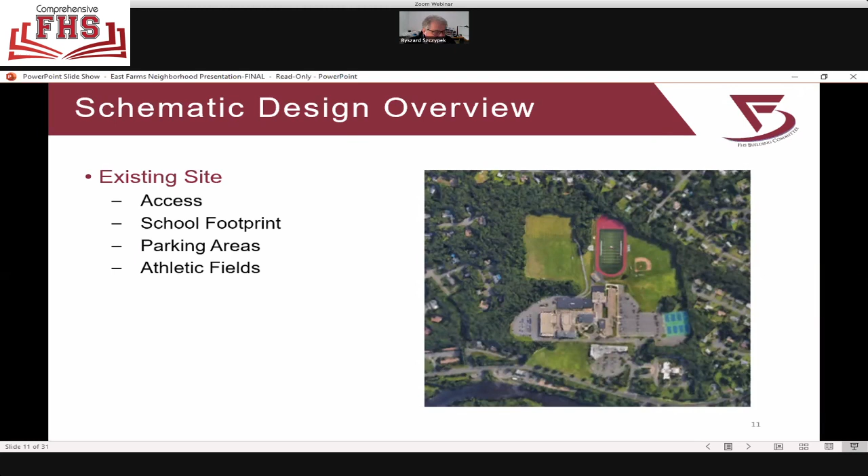Once it was determined that there were no other viable sites available for a new high school, it became our task to develop a design that would be accommodated on this site. So we had to find a way to build a new building on the existing site while minimizing disruption to the existing school. This diagram illustrates our solution.

Right now, it's too narrow, and people trying to create two lanes in a single lane create a dangerous condition. So the project does include improvements to Monteith Drive, making each side wide enough for two legitimate travel lanes. There's also an improvement to the shoulders on each side of the drive for emergency vehicles, should they be necessary.

This proposed layout on the site achieves the goal of making a very compact facility on the existing site while minimizing disruption of the existing building. We did look at the existing building and we determined that a portion of it could be saved, namely the 900 wing, so that's made part of the plan.

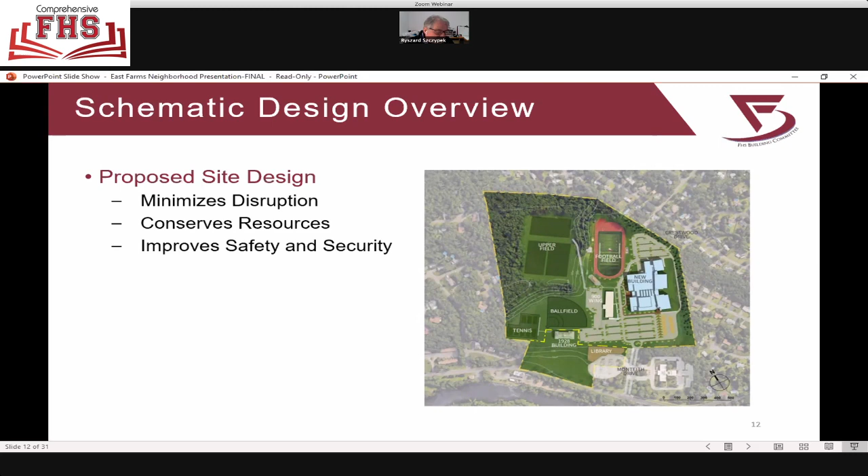This walkway that you see here is between the vehicular drop-off area for cars and also buses on opposite sides of this walkway. The administrative offices are located on the ground floor, immediately adjacent to the entrance. And the exterior is constructed of very energy efficient material, very durable, such as masonry and glass, which is also very easy to maintain.

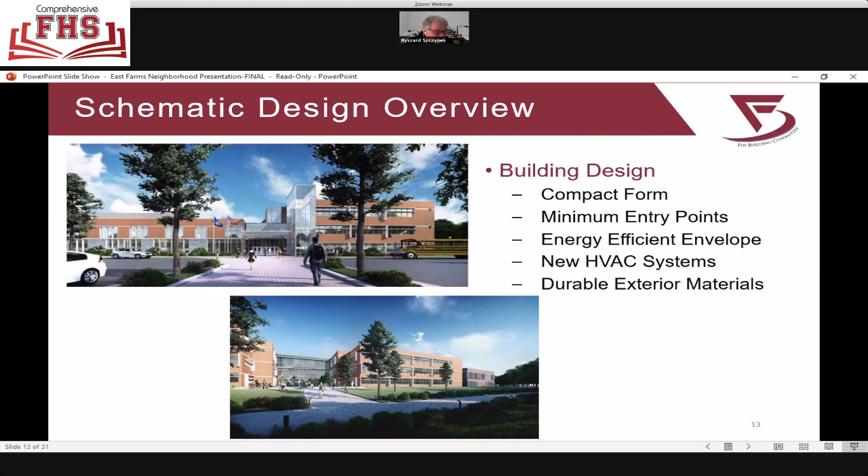This is the loud side of the building. It faces the 900 wing and it faces also the football field. On the opposite side of the building, which is in the illustration on the upper part of this slide, is the quiet side of the building.

This is where the academic spaces are located. There's no public entrance on this side. We do have a walkway, as you can see, that travels along the eastern side of this site, but that walkway is for emergency purposes only. There would be a gate at each end of this walkway, only available for emergency vehicles.

We're also planning some screening that you can see here on the right side of the site in this picture, with some berming and additional plantings.

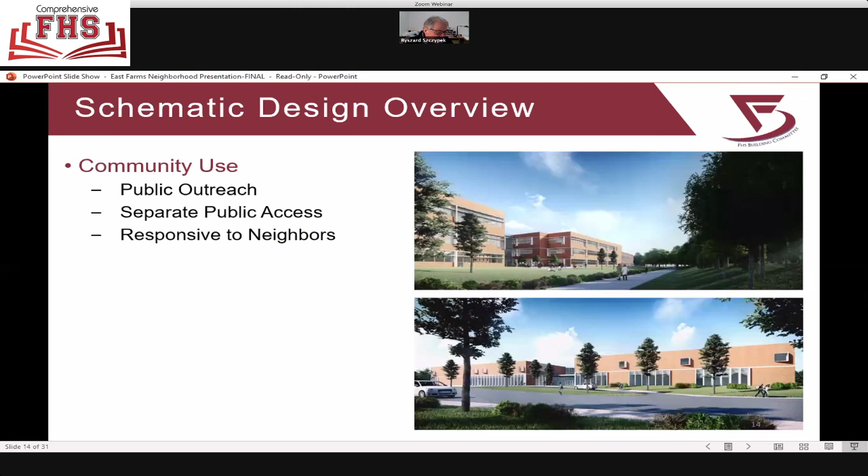The interior of the building will be filled with natural light using skylights and clerestory windows up above. There will be ample circulation area to give the students comfortable space to safely pass between classes. And the interior finishes will be very durable and easy to sanitize and keep clean, such as the porcelain tile floors here in the public spaces.

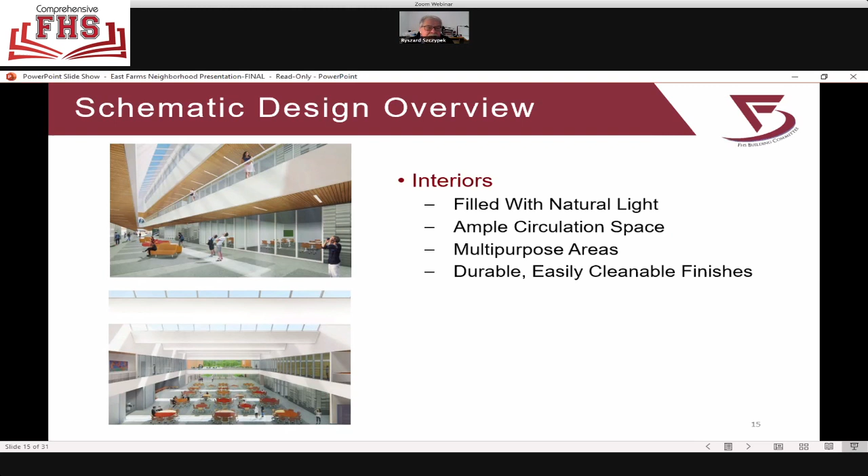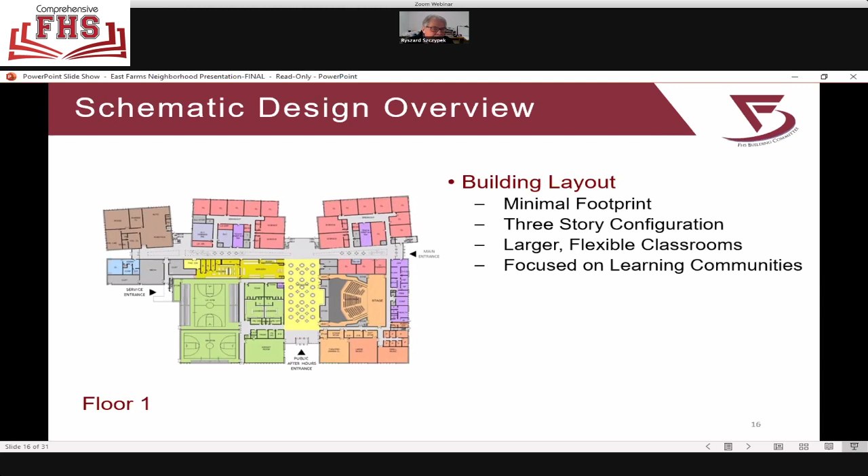We divide the building into two parts. There's the public side, which has all of the major spaces, such as the auditorium, gymnasium, and the cafeteria. And then there's the academic side that has all of the clusters of classrooms that you can see here in the rose-colored spaces.

The cafeteria is that yellow area that is adjacent to the atrium space, and it's located in the center of the building, and it's available all day long. It's not tucked away in the dark corner of the facility. It's a nice, brightly illuminated space, as you can see. And it's adjacent to the auditorium on the right and the gymnasium on the left.

So this could be a wonderful space where we have trophy cases and memorabilia and access to ticketing for events that are happening in the auditorium.

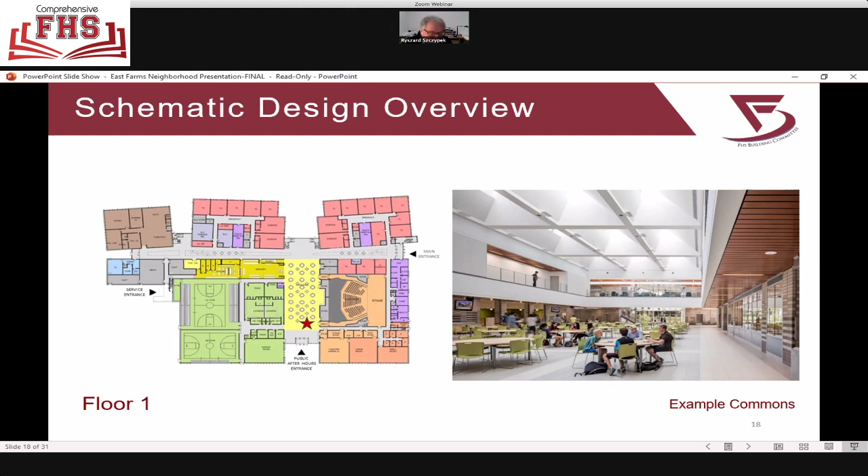The auditorium itself is designed to be a community space as well as a space for high school students who are interested in music and performing arts, but also in the technical aspects of putting on a performance or a presentation. So all of the technical side of the house, if you will, are made very safe for students. You'll see catwalks up above, and those catwalks will have railings so that it is perfectly safe for students to control all of the stage lighting.

I was asked at an earlier neighborhood meeting about the size of this auditorium. It's planned for 650 seats.

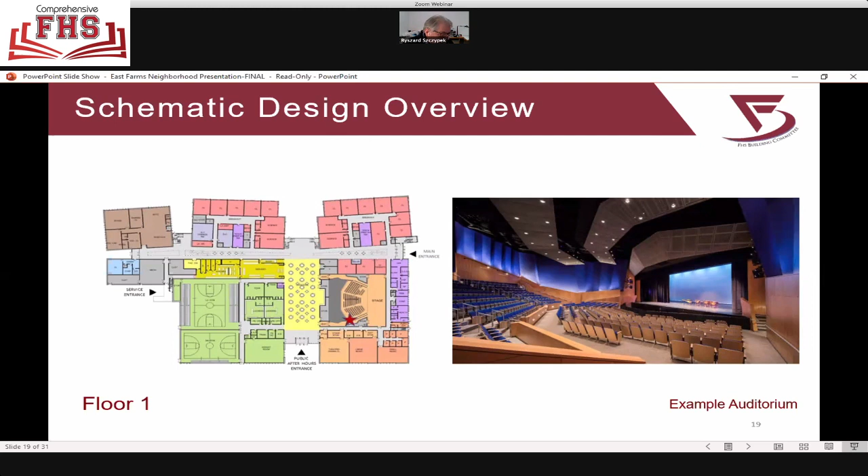On the opposite side is the gymnasium, and this space will have daylight by using a sawtooth structure. As you can see, there are clerestory windows that allow daylight directly into the space. It's possible to even use this gymnasium without turning on the lights.

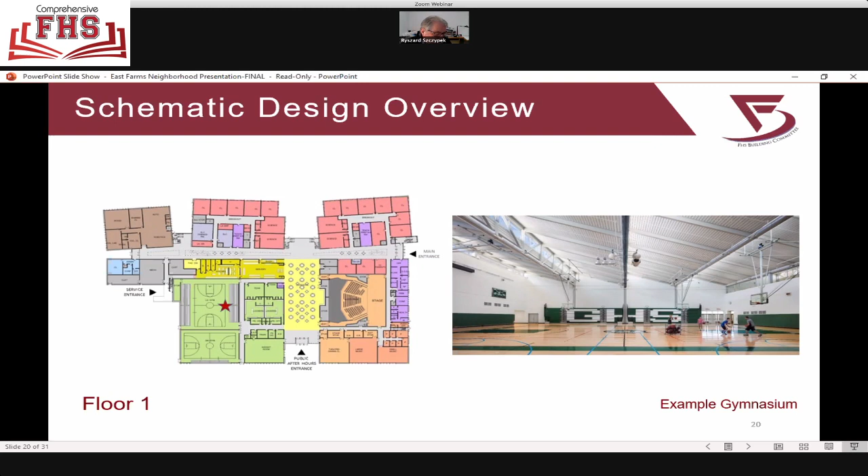If we move to those pink areas where we have classrooms, there are 3 levels of classrooms, 3 floors. One question that was asked was why build a building with 3 floors? Well, we want to make the footprint of the building as compact as possible, so the best way to do that is stack the classrooms into a 3-story configuration. This way, we minimize the roof area we need to build and the foundation area that is necessary.

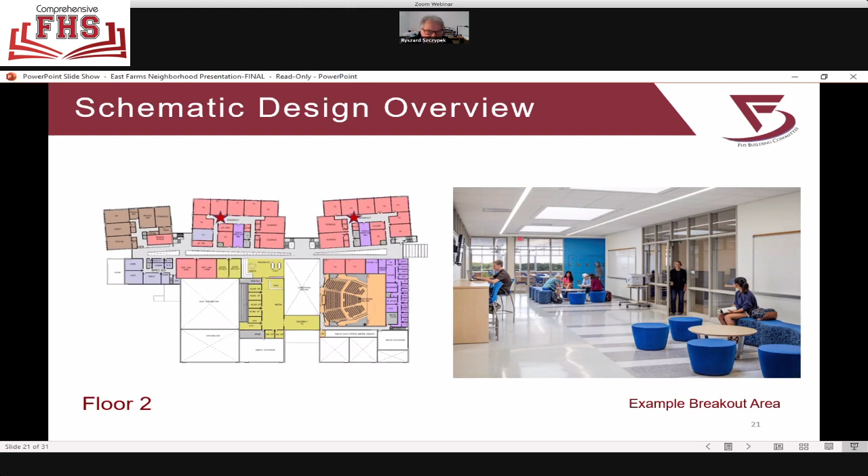These classrooms are clustered around learning community spaces. Immediately outside the classrooms, you'll have breakout areas such as you see in this photograph of a similar project, and adjacent to those breakout areas are the faculty offices behind that glass wall.

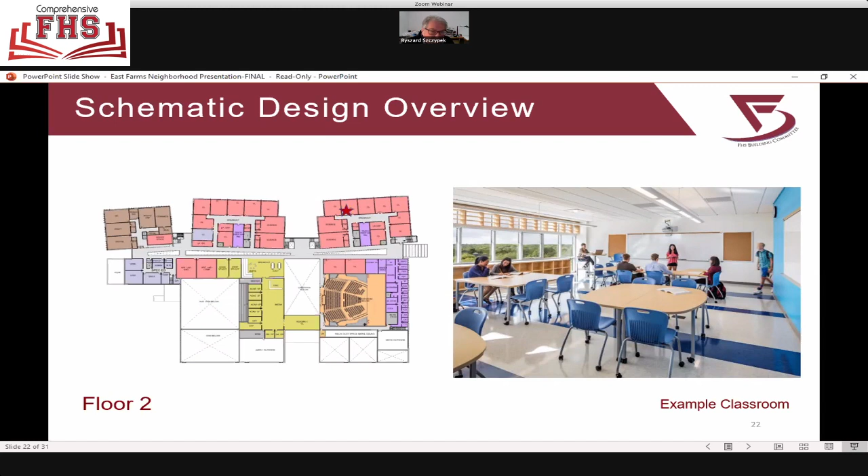The classrooms themselves have movable furniture, which allows the learning to be very flexible. Teachers can rearrange the classrooms to have individual learning, group learning, or seminar kinds of arrangements. This goes a long way to providing options for learning and teaching.

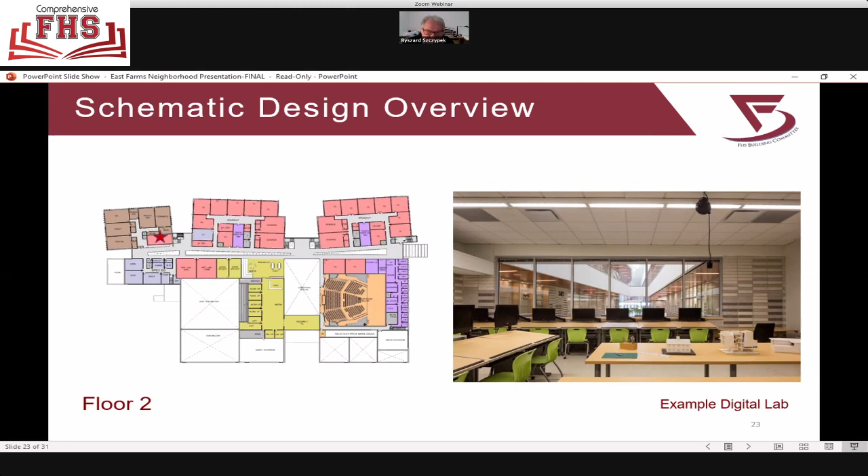We'll also have special rooms such as maker spaces and digital labs. Ideally, we would like to put these spaces behind glass partitions so that you could see learning going on all day long. This adds a lot of excitement to the spaces inside the building.

The media center, which would be located on the middle floor, the 2nd floor, would also be available all the time. It would also be available for community meetings after hours. As you can see, we're making it very transparent so that people see activities.

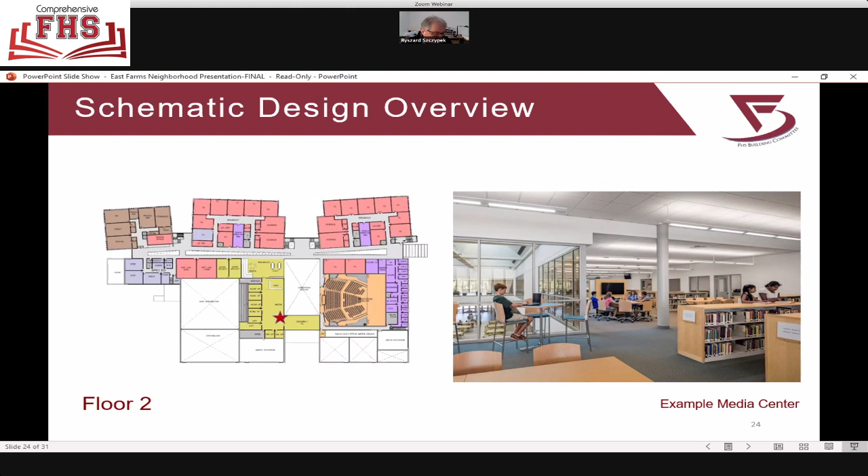I think this is near the end of my slides for the interior. This shows a sample science lab, which happens to be on the 3rd floor. Those are the larger pink spaces, as you can see. There will be space enough for a theory portion of instruction as well as a practical instruction.

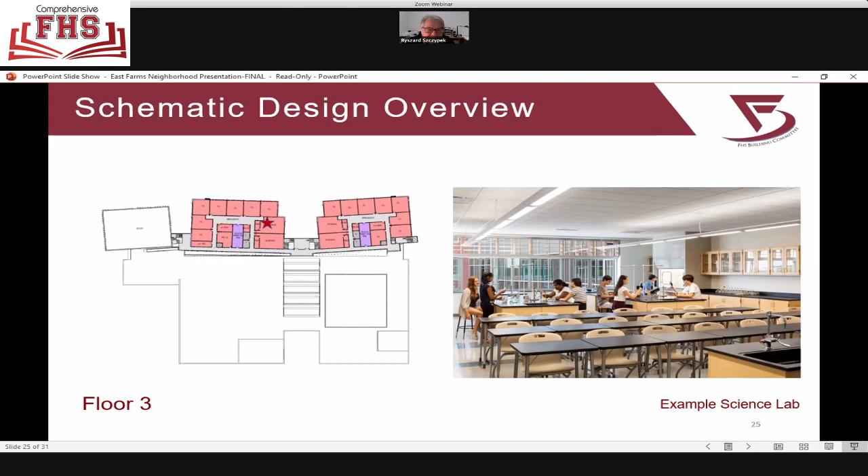Next slide, which will be my last slide. I'd like to say a couple of words about our experience with COVID and what features are included in the building to make sure that in cases of future pandemics, some measures have been taken to reduce the risk of exposure.

Basically, we know that masks are probably the most effective. However, what we've done in the budgeting and planning of this facility is to have larger classrooms, wider corridors, easily cleanable surfaces, touchless plumbing fixtures, and lots of ventilation. We have a higher level of air filtration than you would normally have.

We have the ability to flush out all of the air from the building on a regular basis. We've also divided the ventilation system so that we have separate zones to make it easier to separate cohorts of students and staff, to isolate zones and prevent cross-contamination of air. So we've thought a lot about this and budgeted appropriately for it.

Next, I'd like to have Mark Grilli continue the discussion. He's with Construction Solutions Group, the project manager for this project. Mark? Thank you, Richard. Good evening.

We'll talk a little bit about the estimated total project cost, which is approximately $135.6 million. Town Council set a net municipal project maximum of $110 million for the project, which the Farmington High School Building Committee is committed to delivering below. This will be offset by reimbursement from the state of Connecticut, estimated at approximately $26.3 million.